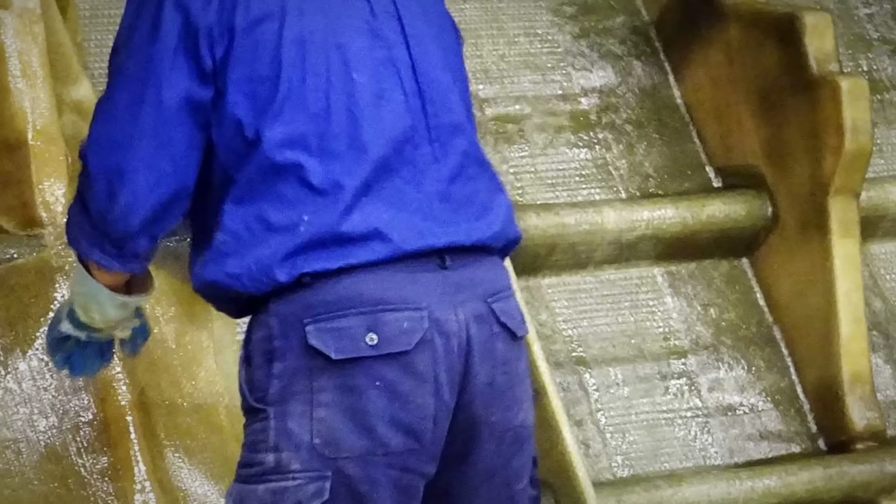Now, a 2016 production 34-foot boat. Spongy decks, delaminated stringer bonds, blistering below the waterline on a boat barely old enough to finance. Here is what does not add up. The stronger resin costs $3.91 per square foot. The weaker resin they actually use costs $7.50 per square foot. They are paying more to build a hull that fails.

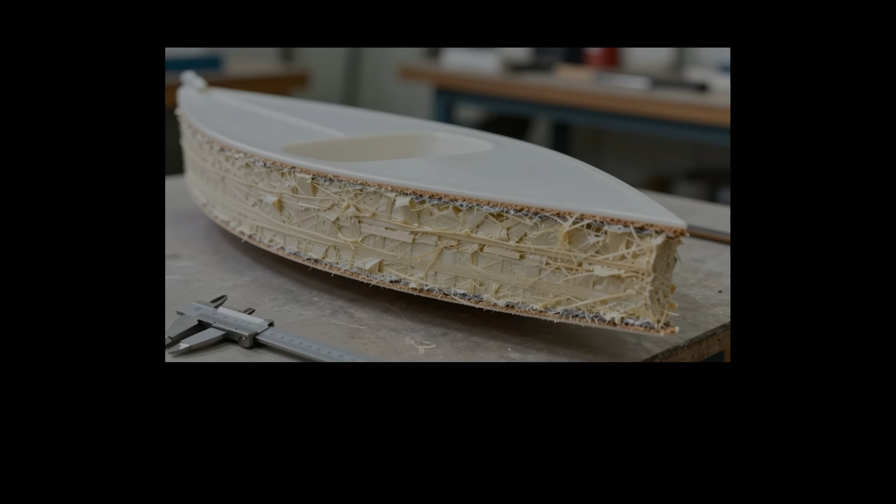Lay your palm flat against the hull of a Pearson from the 1970s and the surface feels cold, dense, almost indifferent to your touch. The gelcoat is just a thin shell over a wall of solid fiberglass. No give, no echo, just a muted resistance. Tap it with a knuckle, and the sound is unmistakable.

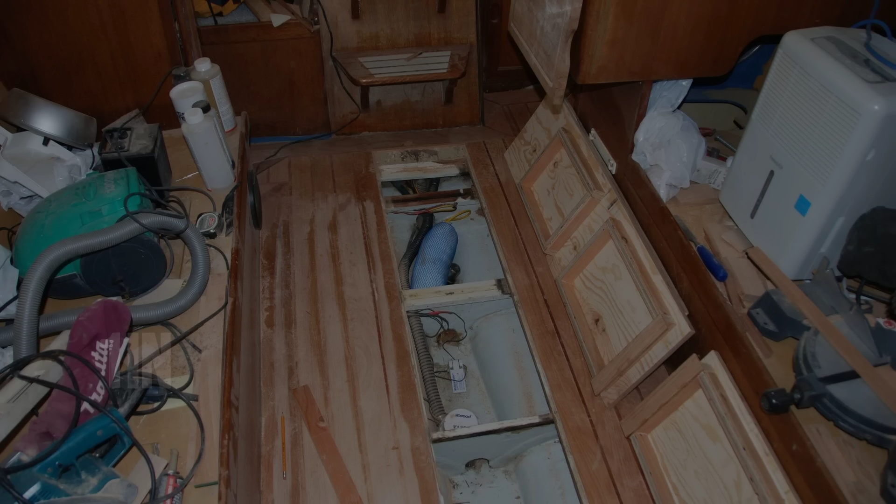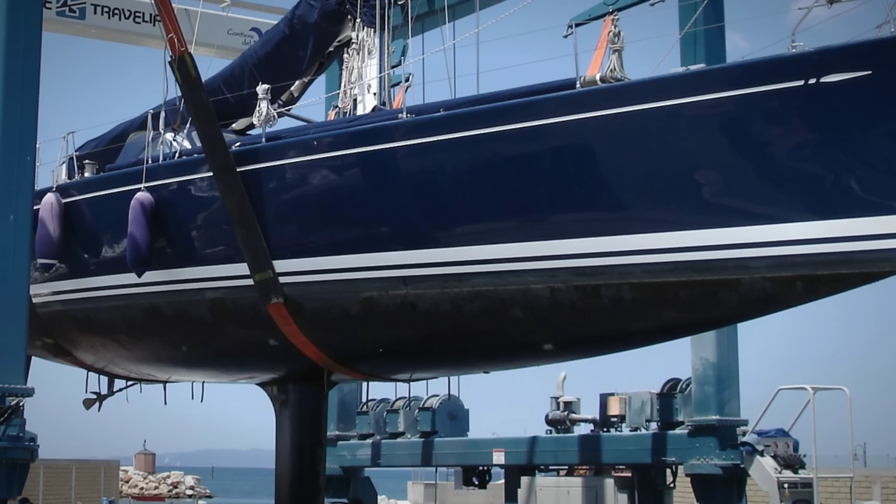A deep, ringing note that travels through an inch of hand-laid glass, woven roving stacked thick enough to dull any vibration. It is the sound of mass, of a hull built to shrug off decades of strain, water, and neglect. There is nothing accidental about that weight.

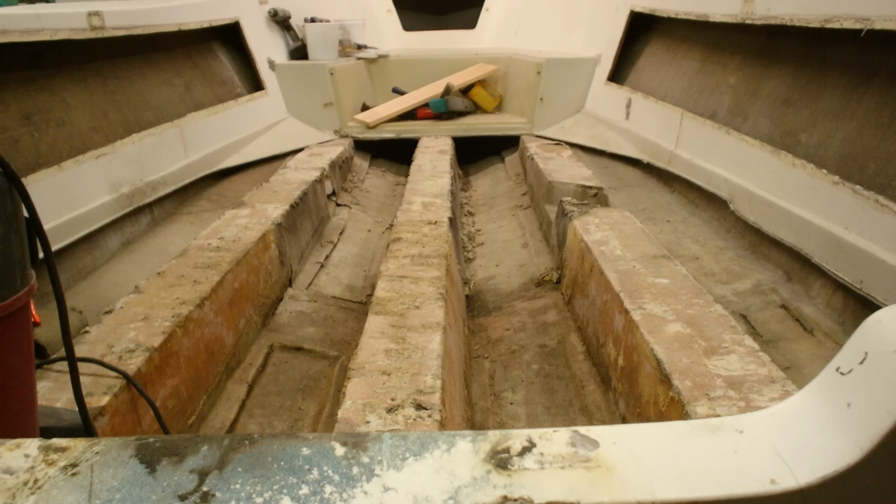Hull schedules from the era list layers of cloth and mat, each one hand-wet and rolled, building up a barrier nearly as thick as a butcher's block. No core, no sandwich, no shortcuts, just glass and resin, stacked until the hull could outlive its owner.

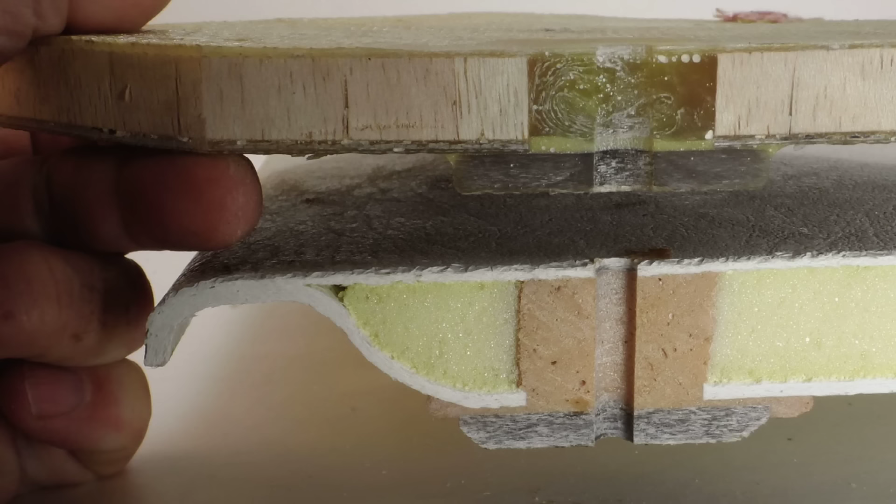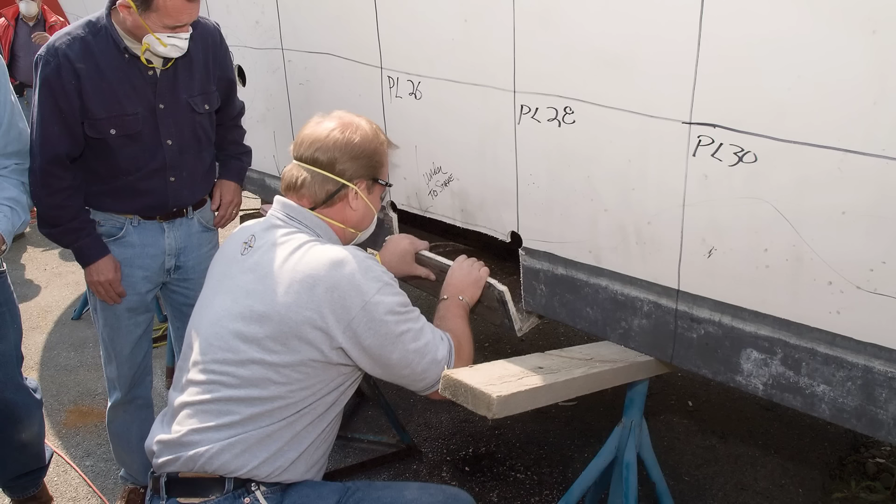Now, move to a modern production cruiser, built 40 years later. The first thing you notice is not a sound, but a feeling. The hull flexes under pressure from your thumb. The deck compresses ever so slightly beneath a heel. Tap the skin and the vibration is sharp, almost hollow, a quick plastic note that dies in the foam core.

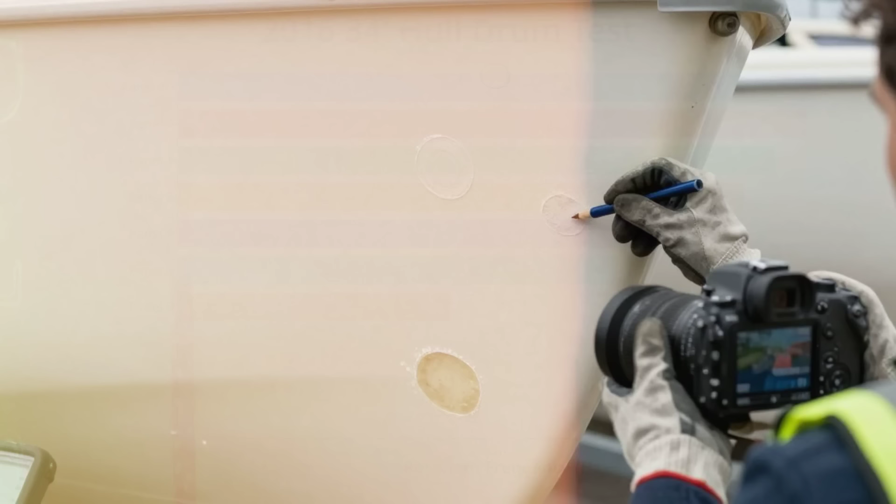The outer layer is thin, maybe 2 millimeters of glass, then a sandwich of lightweight foam, then another wafer of glass inside. What used to be a fortress is now a shell, engineered for weight savings and ease of assembly. The difference is not subtle. A drum test on a 2016 model yields scattered, uneven tones. Some panels ring, others thud, and a few simply buzz, betraying voids or bonds that never fully cured.

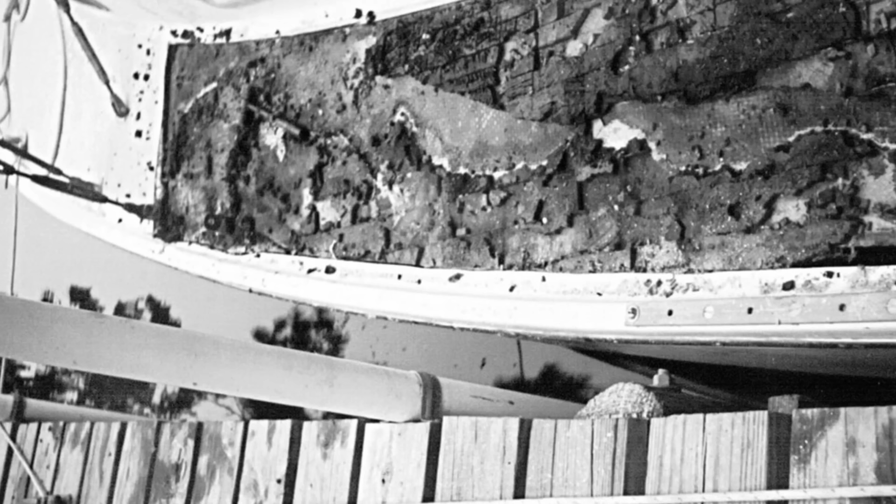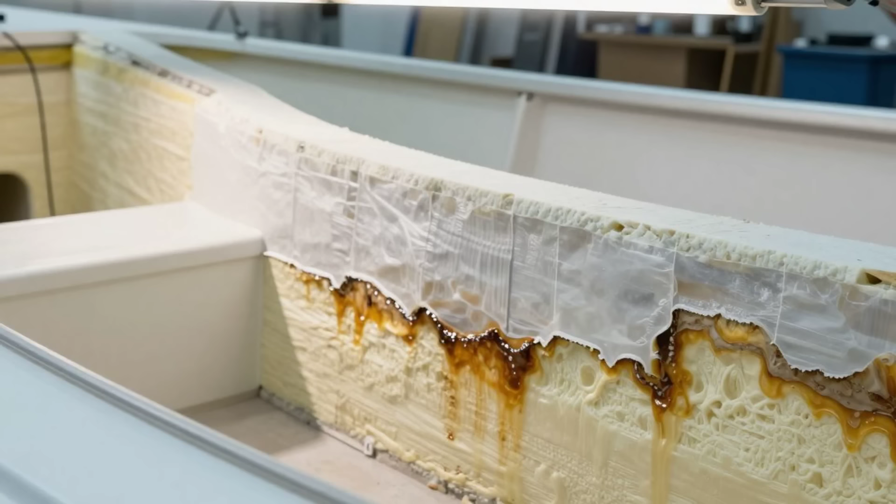People say the old hulls were overbuilt, as if that is a flaw. But there is a reason those boats still pass survey, still cross oceans, still sell for real money after 40 years. The new hulls, by contrast, can feel like they are holding together out of habit.

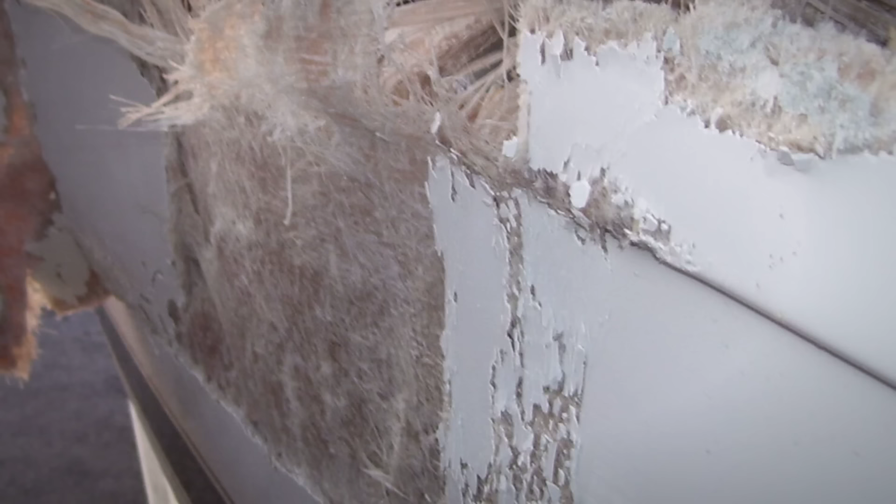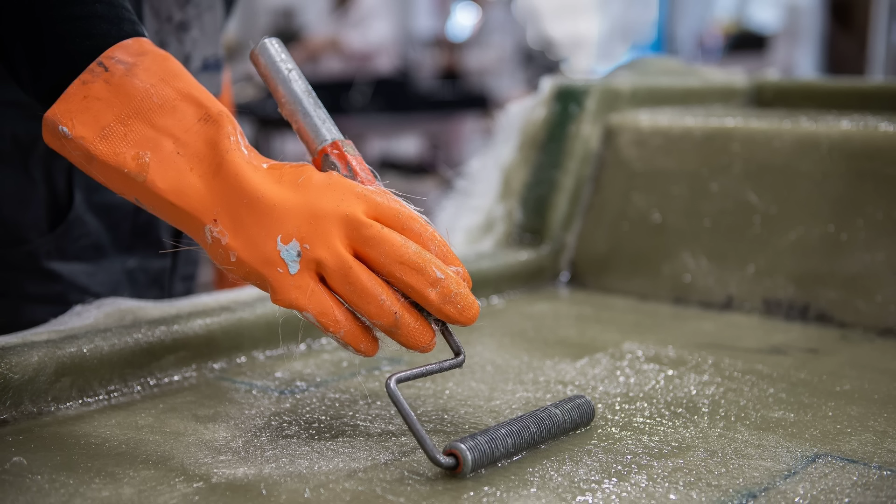The tactile difference is the first warning. The sound is the second. Something in the structure has changed, and you do not need a spreadsheet to sense it. The numbers are coming, and when you see them, the feeling in your hand will finally make sense. Here are the numbers they hoped you'd never see. Start with the resin math.

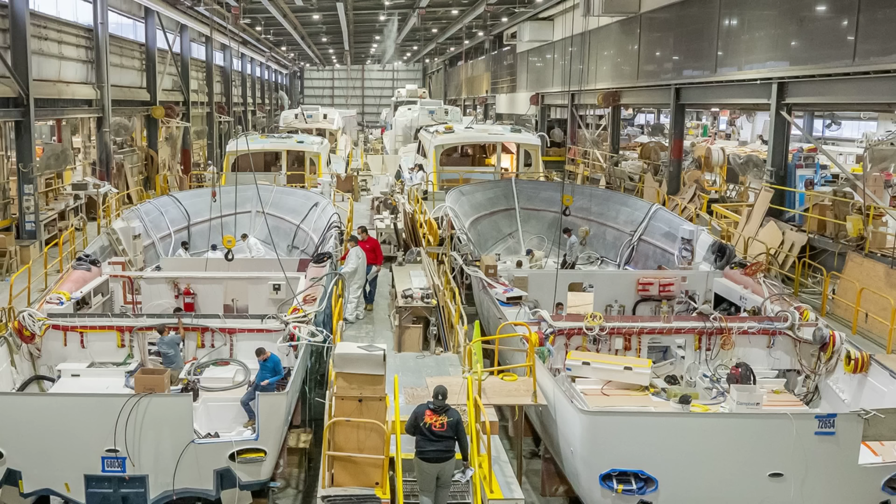The market is supposed to believe that polyester is the cheap way out, but the actual cost sheets tell a different story. For a square foot of hull, epoxy resin with woven glass clocks in at $3.91 per square foot. The so-called budget option, polyester with chopped strand mat, lands at $7.50 per square foot. That is not an outlier. It is a documented inversion, and it means builders are paying more to get less strength, less durability, and a shorter hull lifespan.

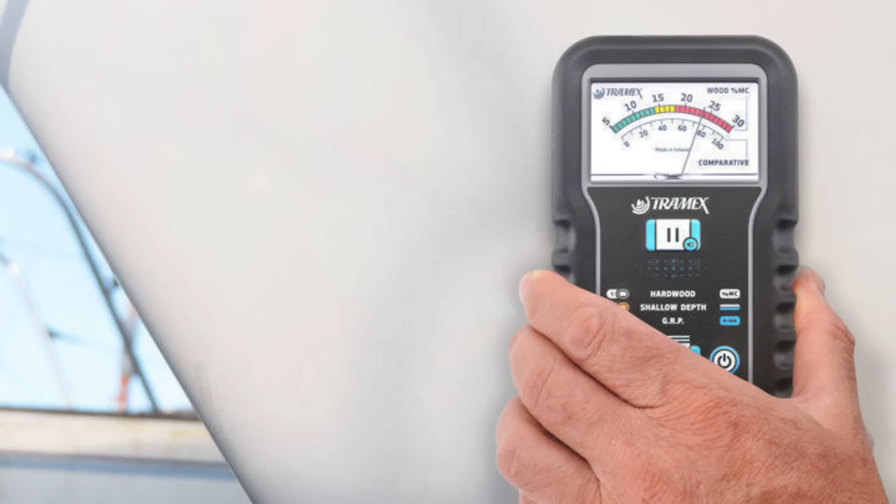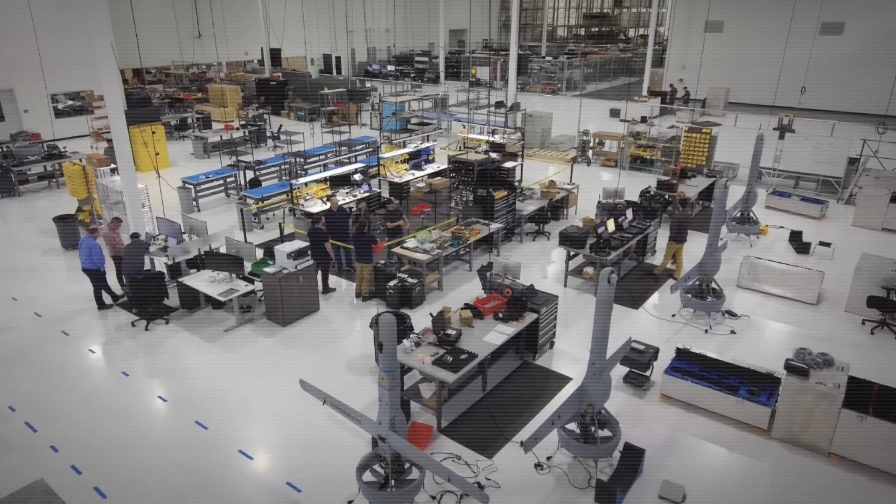Now take the labor that is supposed to keep these shortcuts in check. A dedicated quality control supervisor, someone who inspects every hull for voids, dry layup, and missed bonds, costs about $1,000 per boat. That is the gap. Skip that line item, and you pocket the difference. The result is a hull that leaves the factory with hidden defects baked in. Defects that will surface always, but never under warranty.

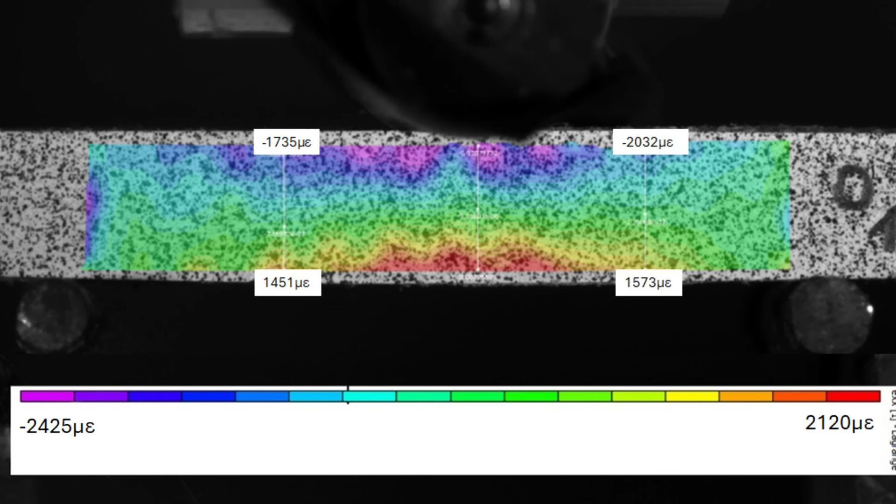Material science does not care about marketing. Polyester resin stretches to failure at about 1 to 2% elongation. Epoxy reaches 3.5 to 4.5% before it cracks. In practical terms, that is the difference between a hull that flexes and recovers, and a hull that micro-cracks under the stress of a single hard grounding. Every percentage point is a margin that has been erased by choice, not by accident.

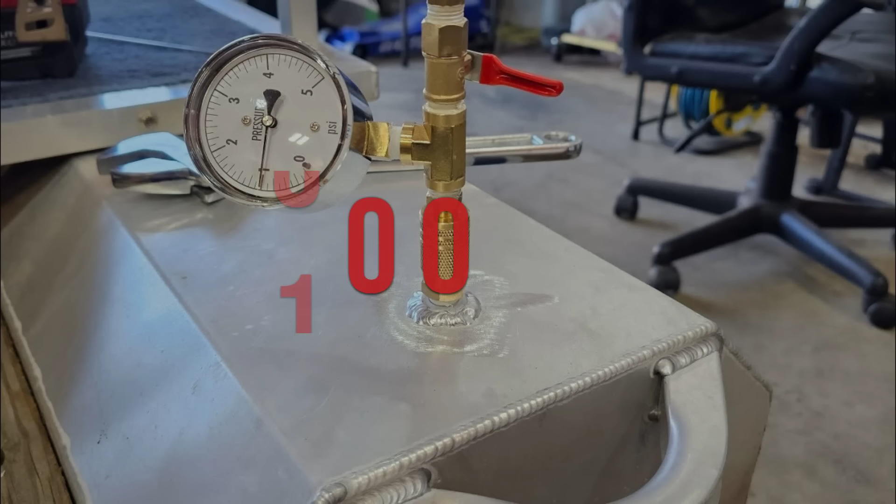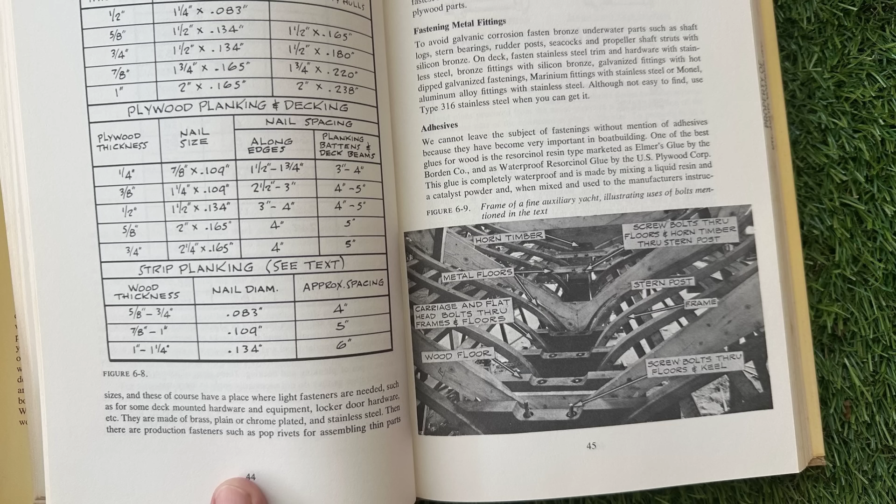Osmotic blistering is a numbers game too. When water gets past the gel coat, pressure inside a blister can reach 100 psi. That is enough to pry apart a thin laminate, especially when the skin is barely 2 millimeters thick. The industry's own manuals confirm these thresholds. The risk is not theoretical. It is measurable, repeatable, and ignored by design.

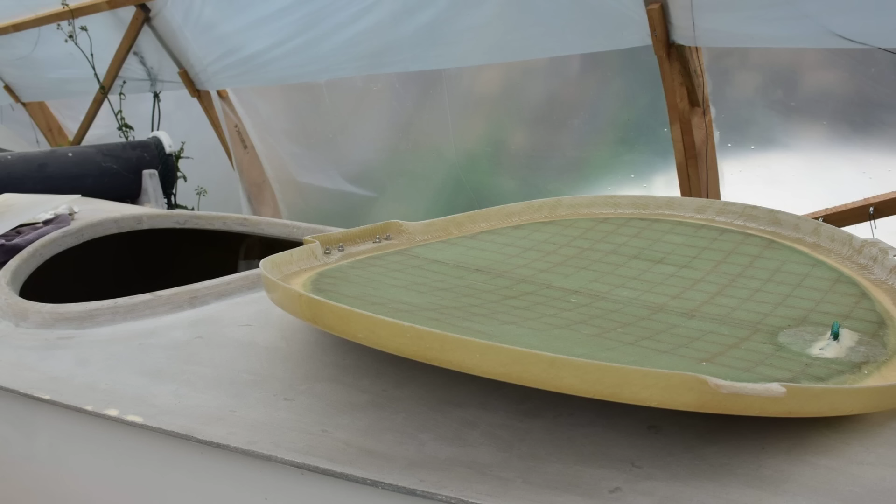Then there is the timeline. Lenders and insurers quietly cap their risk at 15 to 20 years for most modern production hulls. That is not a coincidence. It is an actuarial echo of the engineered failure window, the moment when the cost savings come due and the next owner inherits the bill.

These numbers are not opinions. They are the ledger entries of a business model that trades structural integrity for short-term margin. The math is right there, and it is not on your side.

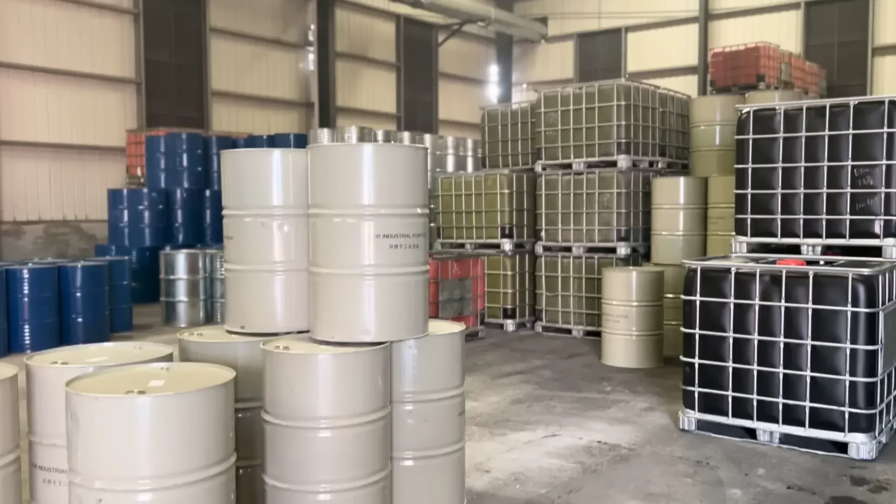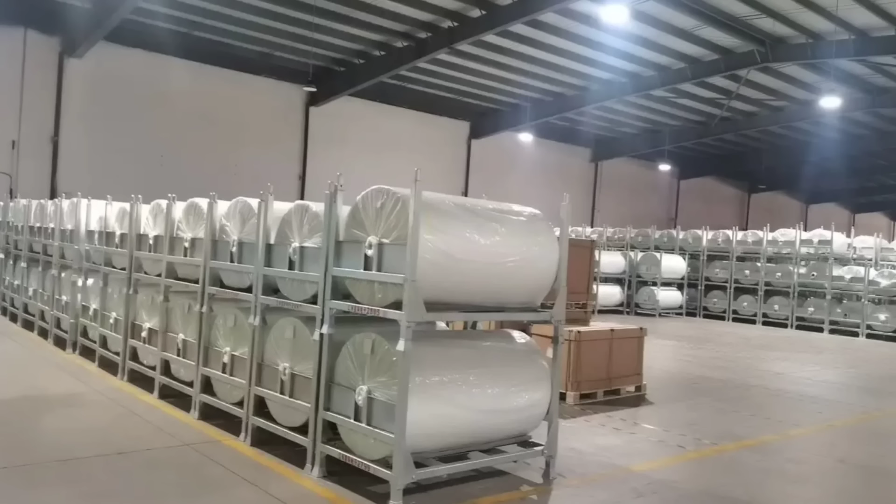The numbers first shift in the resin. Polyester, long favored for its speed and low upfront cost, now costs more per square foot than a thinner, stronger epoxy layup. Builders pay $7.50 per square foot for polyester and chopped strand mat, compared to $3.91 for epoxy and woven glass.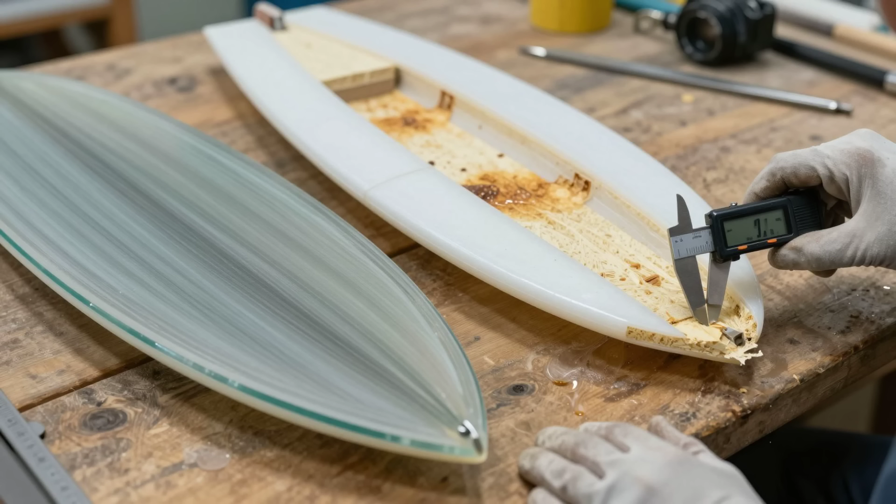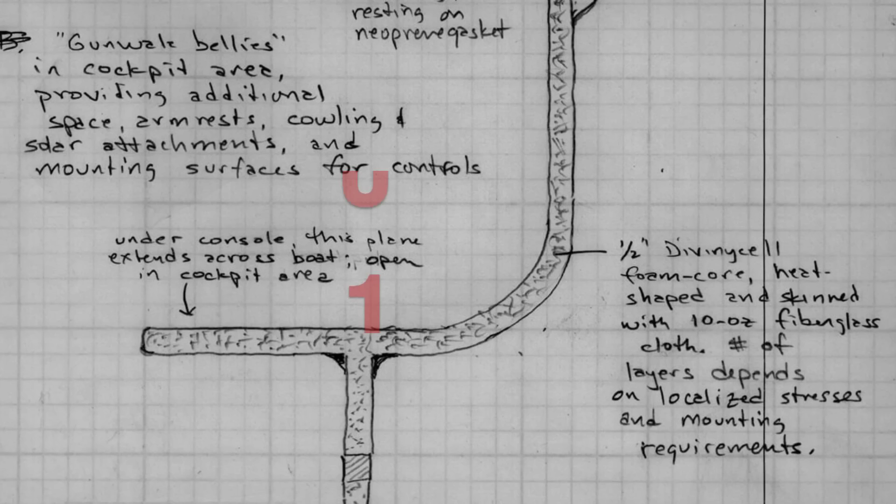The difference is stark. Polyester glass coupons fail at 1 to 2% elongation, while epoxy stretches to 4%. That margin is the line between a hull that cracks in a storm and one that survives. Layup thickness tells the next part of the story. Older hulls stacked up to an inch of glass, 6 or more layers of woven roving and mat. Modern hulls often have just 2 millimeters of glass on the outer skin before the core. That is thinner than a credit card.

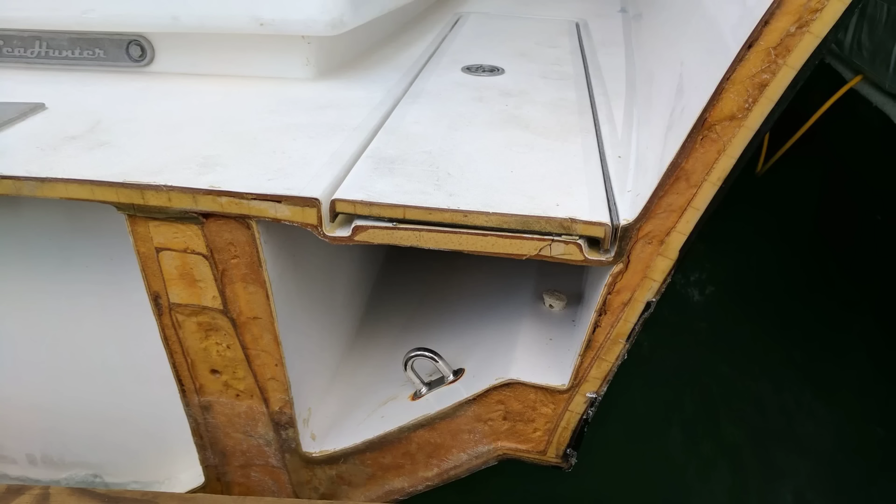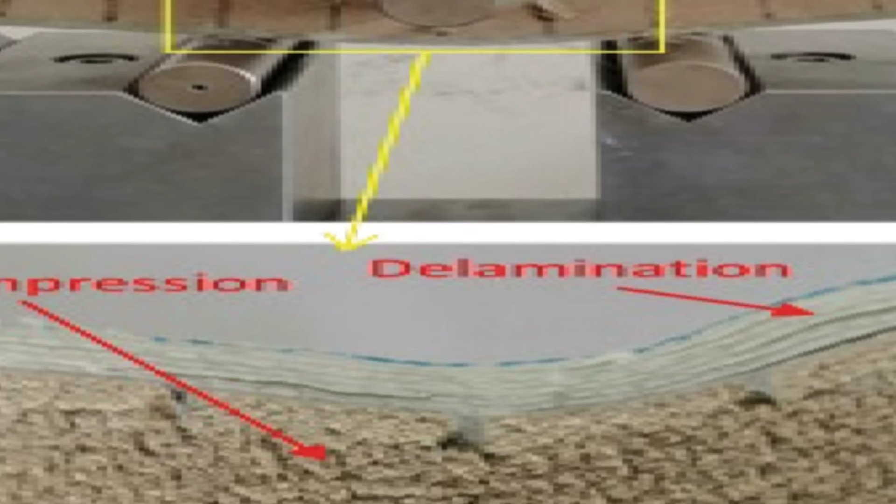The core, foam or balsa, adds stiffness but brings new risks. Closed cell foam absorbs less than 2% water by volume, but a single breach or missed bond can turn it into a sponge. Water migrates along the bond line, delaminating the skin from the core with every freeze-thaw or pressure cycle. Balsa fares worse. Once wet, it never truly dries, and rot spreads unseen, often escaping notice until the hull is compromised. Each decision, resin, layup, core, trades durability for convenience.

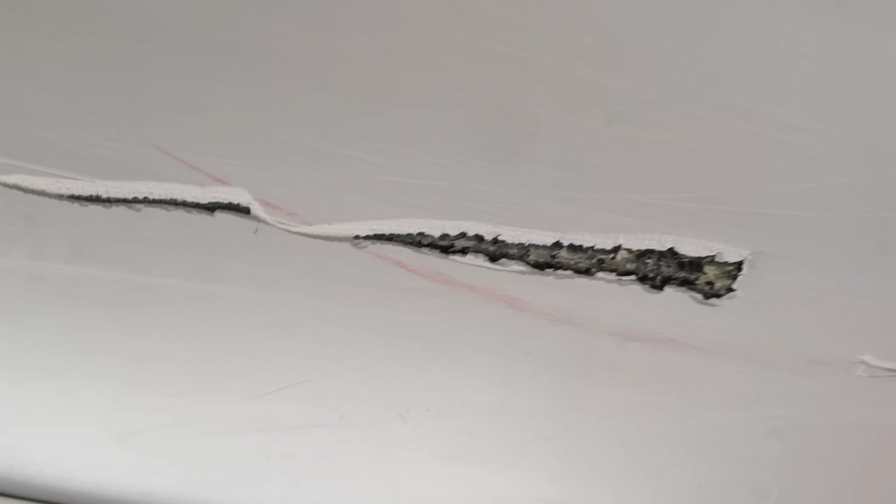The numbers are clear. Every shortcut compounds the next vulnerability, and the owner inherits the consequences: rising repair bills, lost value, and sometimes the slow decline of a boat built to last but engineered to fail. Barrier coat disappears from the build list with a single line that says omit epoxy barrier except at structural joints. On paper, it is a minor omission. In practice, it leaves the hull exposed, just gel coat and hope between the ocean and the core.

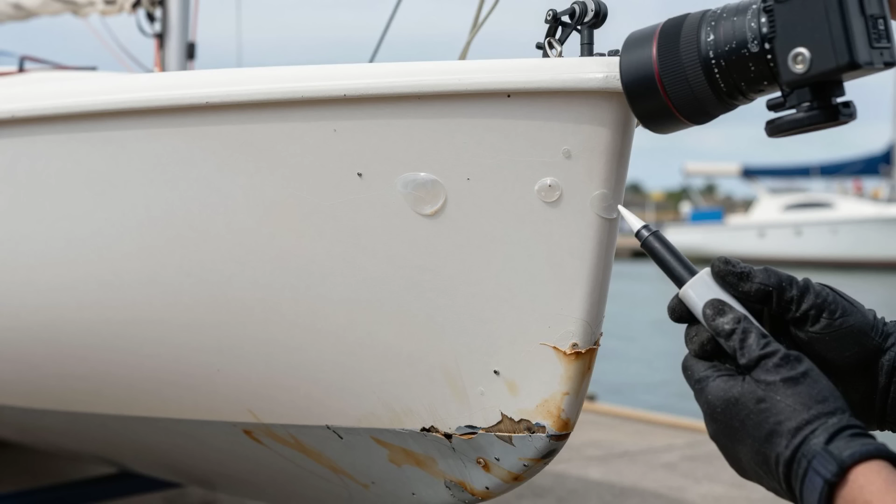Polyester resin breathes water vapor. Epoxy blocks it. Skip the barrier, and every scratch or pinhole becomes an entry point. The savings are immediate, a few hours and a few $100s per hull. The damage arrives years later in blisters and swelling that no warranty will touch.

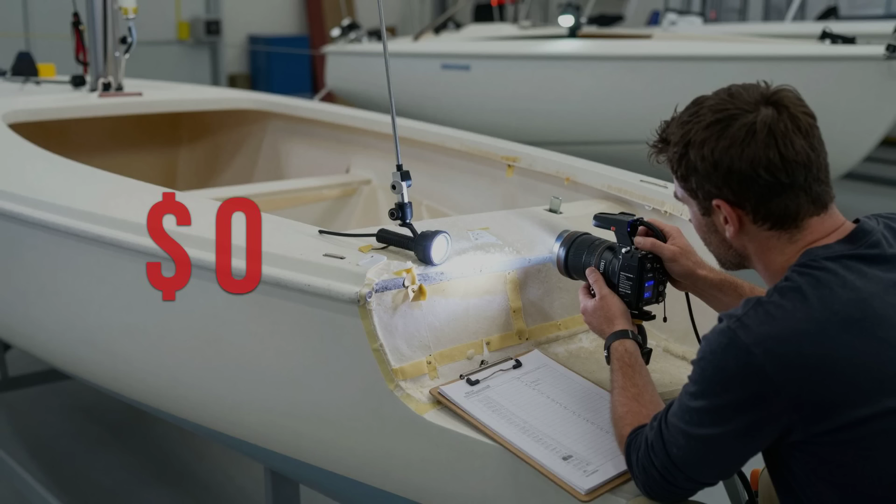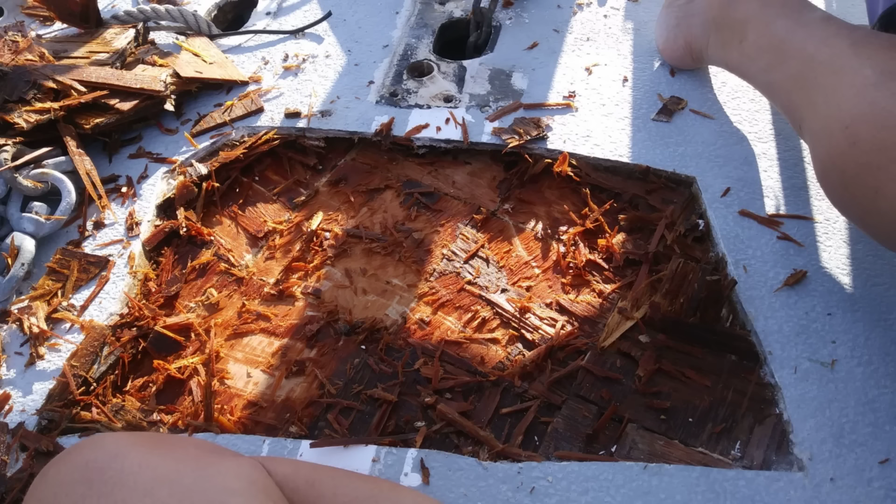Quality control is the next shortcut, buried in the numbers. A factory can hire a dedicated inspector for about $1,000 per boat, one person to check every bond, every tab, every core for dry spots and voids. The math is simple. Most hidden defects could be caught, but that line is easy to cut. The savings show up on the balance sheet. The failures show up in the field: dry layups, missed bonds, cores that never fully adhere. These are not rare mistakes. They are the predictable result of skipping the only step that could have stopped them.

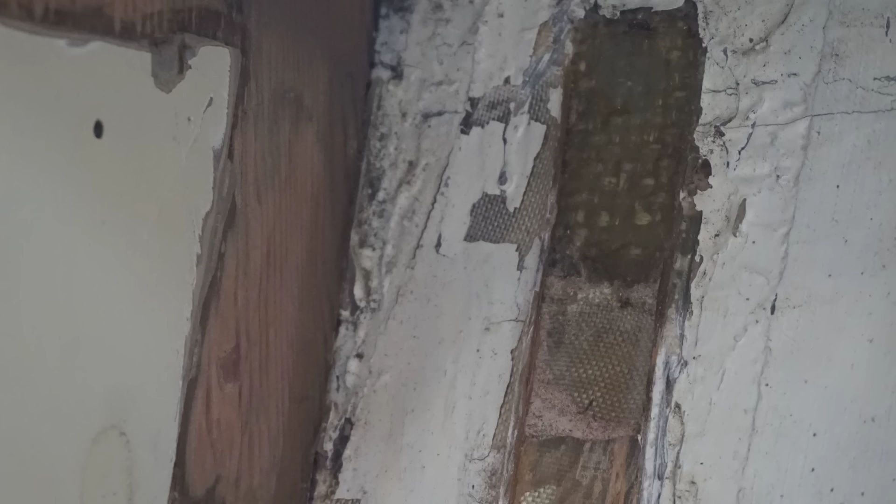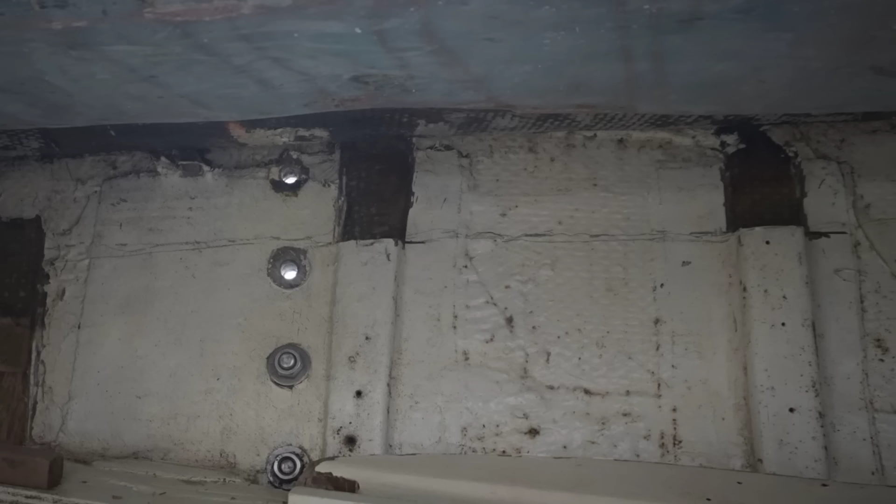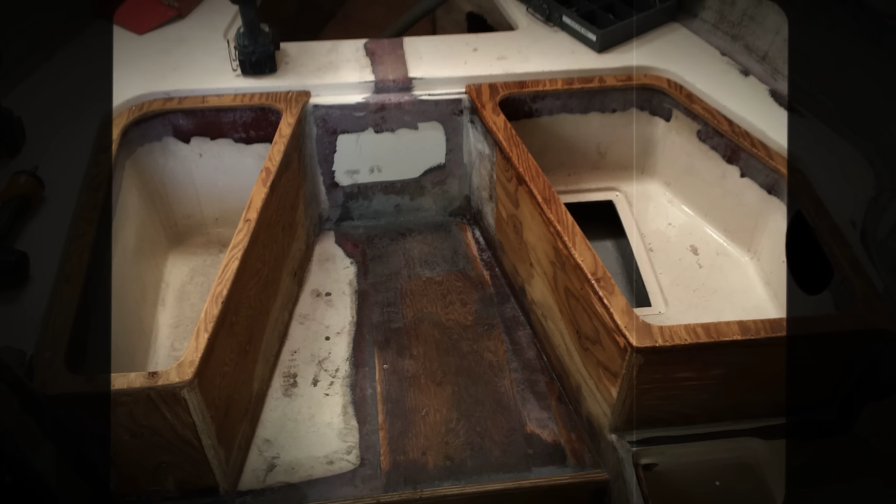Grid bonding reveals the logic. Builders save the epoxy for one place, the bulkhead tabs. Everywhere else, polyester resin holds the structure together. The proof is physical. Cut open a hull and the bulkhead tabs stand out. Different color, different sheen. Epoxy, labeled and logged, bonds the visible joint. The rest relies on the cheaper resin, out of sight.

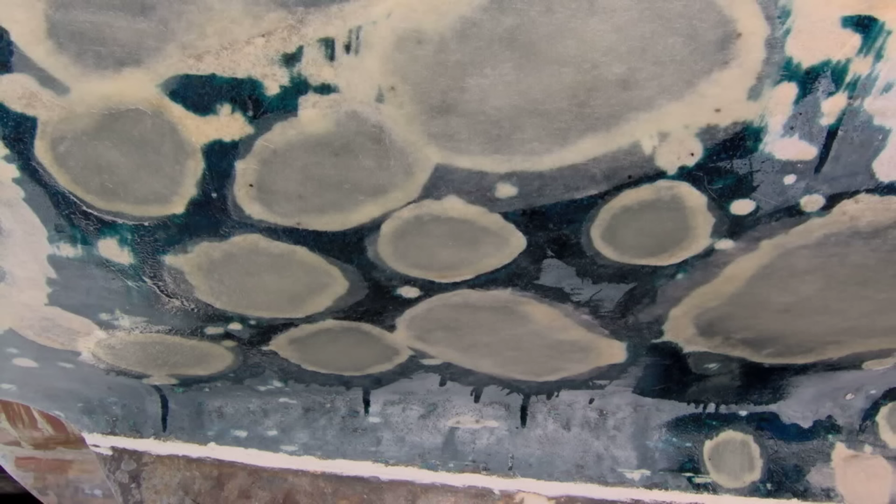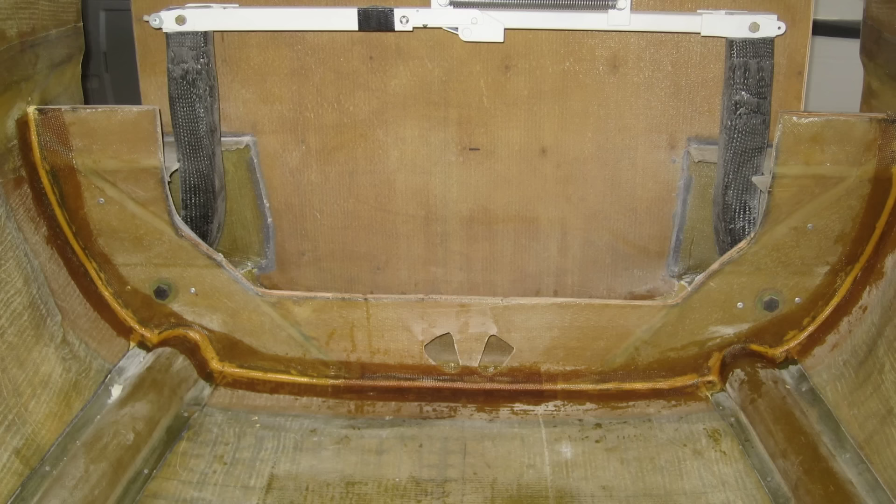One retired owner learned the cost. He paid extra for a blue water package, trusting the promise of offshore strength. 5 years later, blisters spread across the hull. The surveyor's hammer mapped delamination along the grid lines where the barrier coat was omitted. Insurance refused the claim. The builder pointed to the fine print. His retirement plan dissolved in the cost of repairs. These are not isolated errors. They are choices made by people who know exactly what they are doing. The evidence is in the resin, in the skipped steps, in the places where the right material appears only where it is visible.

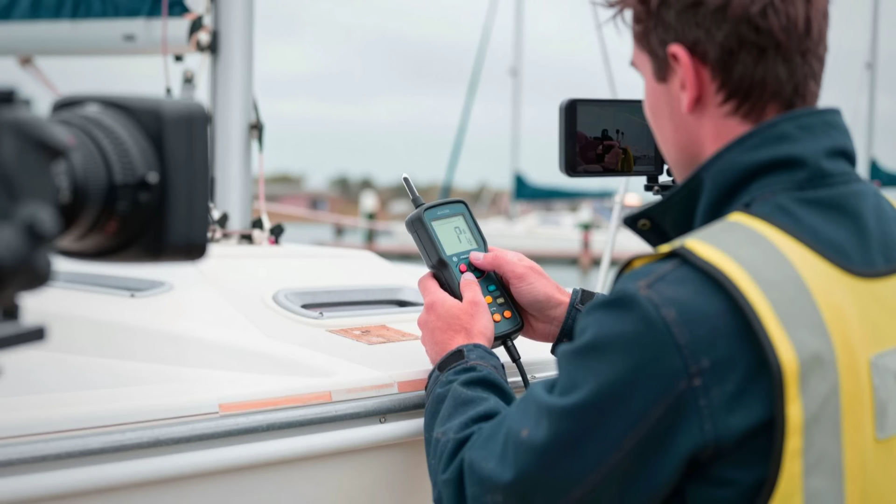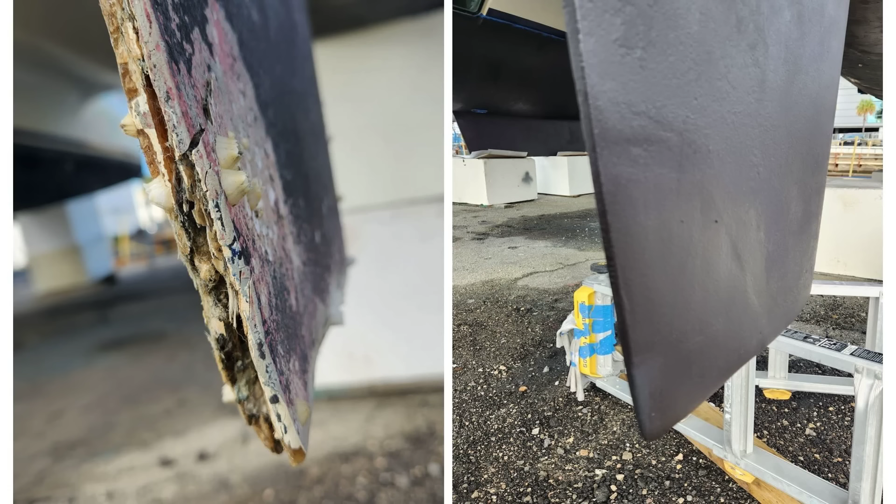Moisture meters and survey hammers promise peace of mind, but the reality beneath a modern hull is far less reassuring. The tools most buyers rely on are blind to the failures that matter. A moisture meter reads surface conductivity, a few millimeters deep at best, while waterlogged balsa or foam can hide inches below, sealed off by a thin skin that reads dry. Surveyors know the limits. A deck or hull can pass inspection with a perfect meter reading, even as water migrates along a failed bond line and delaminates the skin from the core out of sight.

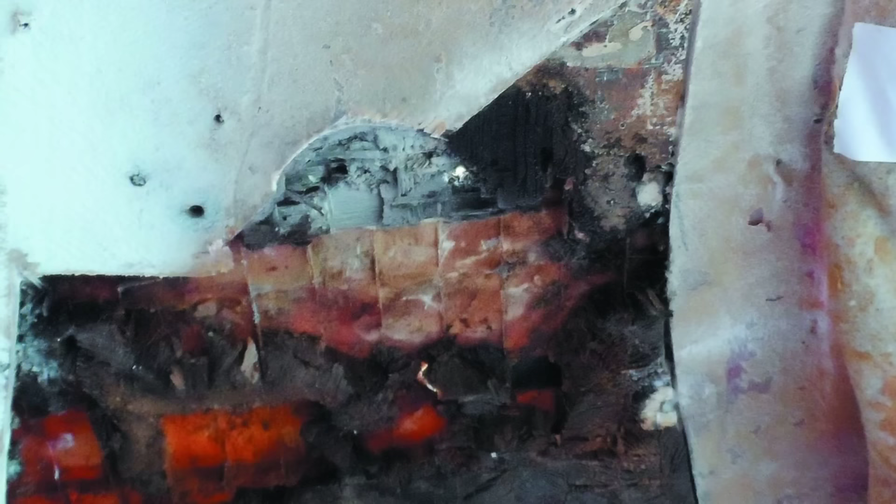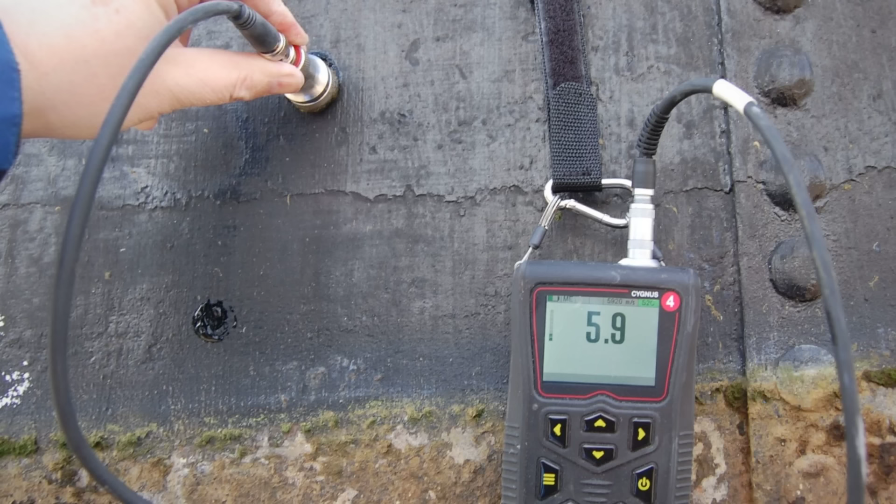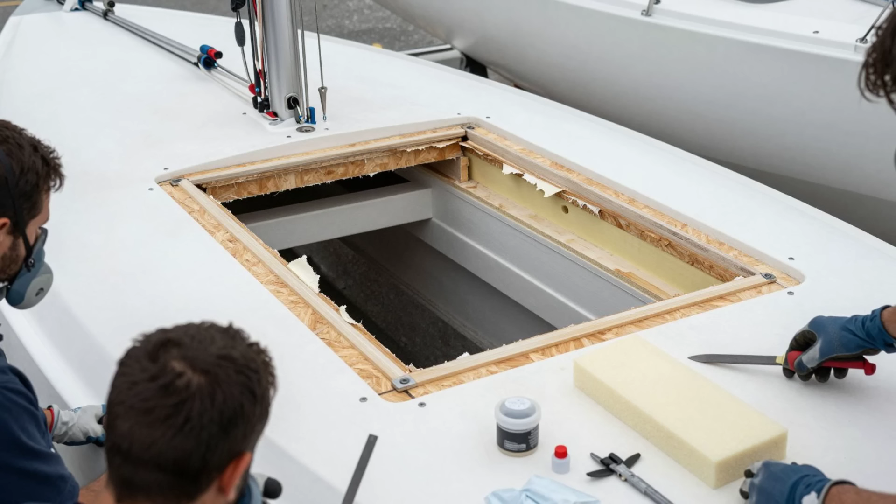False negatives aren't rare. Field reports and technical bulletins document cases where moisture meters gave the all clear, only for a core sample to reveal rot or a void spreading like a bruise beneath the laminate. The underlying physics is simple. Water travels along the weakest plane, often the glue line between core and skin, and unless the skin is breached or the core is exposed, the meter sees nothing. Even advanced ultrasonic gauges can struggle to resolve a delamination, unless the void is large and continuous. Small, isolated failures, the kind that start the chain reaction, go undetected until the damage is irreversible.

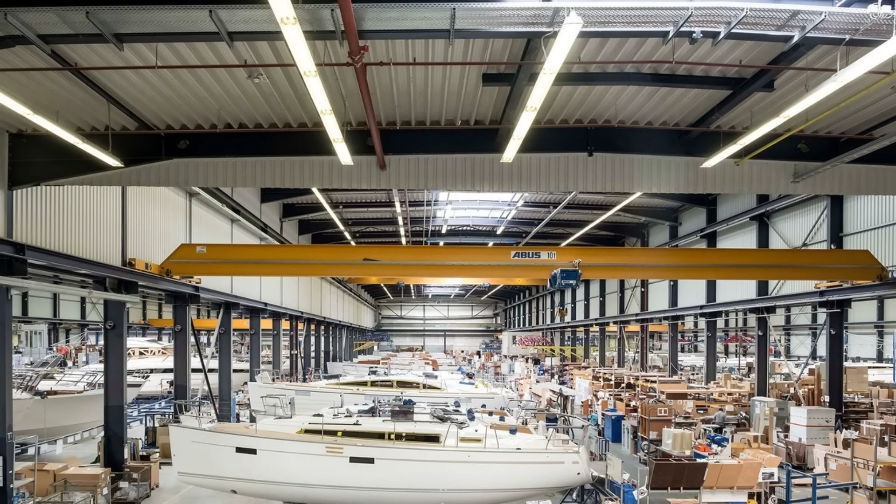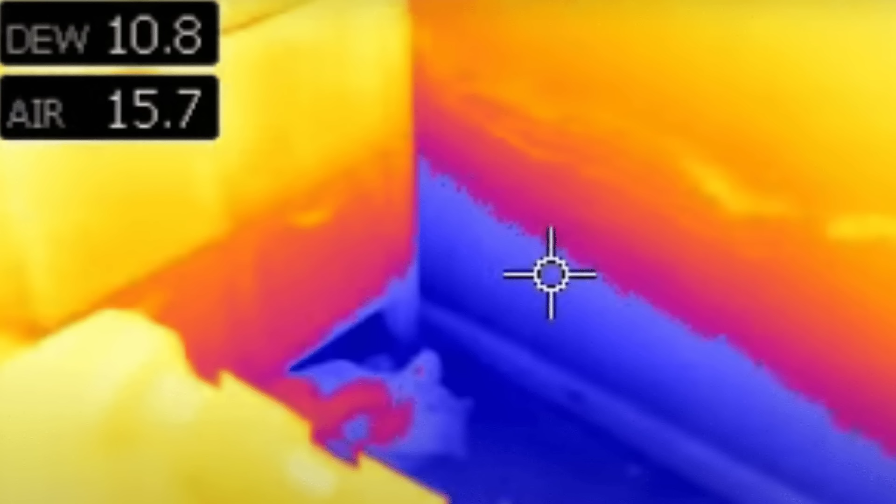David Pascoe's critique of moisture meters is blunt. They offer a false sense of security, especially on cored hulls built to a price. The high rate of missed failures is not a quirk. It is a technical limitation. Owners who trust the survey alone are gambling with thousands of dollars. The real risk is invisible, and by the time the symptoms appear, soft spots, blisters, or a hollow thud, the financial fallout is already set in motion. A hull's journey does not end at launch.

Ownership shifts from the first buyer, often a young family eager for adventure, to a second buyer who might stretch finances for a loan or new insurance. By the time a third owner steps aboard, usually someone nearing retirement, the rules have already changed. Lenders and insurers track hull age with precision. Most production boats built after 2000 hit a wall at 15 to 20 years.

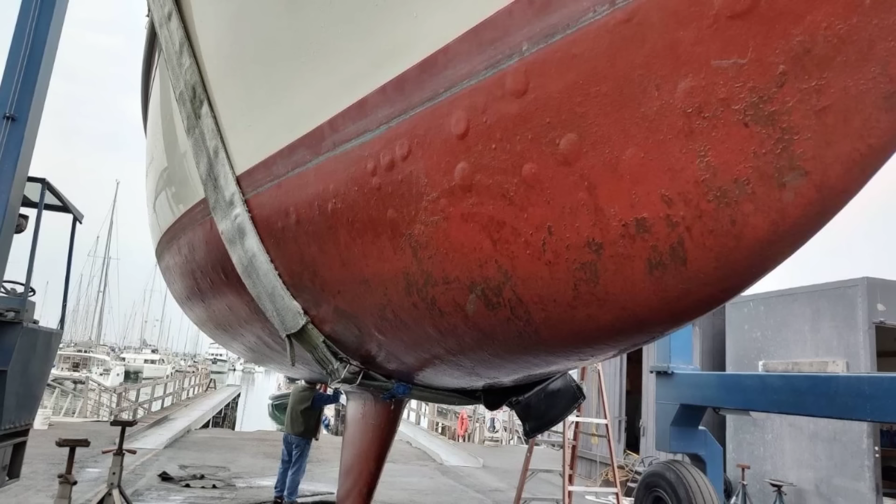Loans become harder to secure. Insurance terms shrink and premiums jump. Some carriers will not even quote. These are not arbitrary decisions. Actuarial data shows risk climbing steeply as hidden flaws, blistering, core rot, and delamination emerge just as warranties expire.

In the used market, the pattern is clear. Over 3,400 production sailboats, most between 9 and 15 years old, fill the listings. This is not just turnover, it is owners racing to sell before the next survey or renewal. In Florida, Texas, and Louisiana, insurers have quietly raised premiums by up to 28% for boats in this age band, citing a rise in claims. Lenders now cap loans at 15 years, survey results be damned.

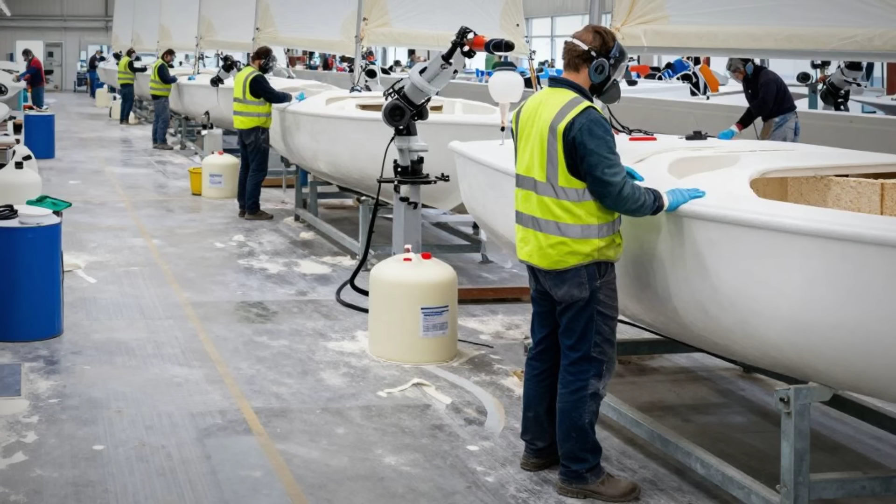The result is a steady transfer of risk, from builder to first owner, then to the next, and finally to the retiree, hoping for one last voyage. By then, repair bills are uninsurable, resale value collapses, and the financial hit lands on those least able to absorb it. This is not about neglect. It is a system built to shift costs downstream, where the illusion of a bargain vanishes and the last owner shoulders the real price.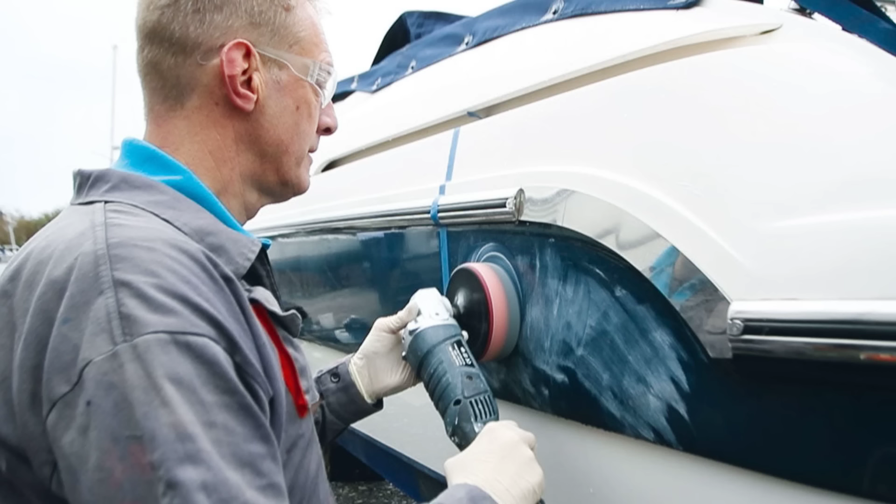Accountants don't use hammers or meters. They use spreadsheets. The real decisions get made in quiet offices, not on the shop floor. Every shortcut in a production hull starts as a row in a ledger, weighed against the cost of warranty claims in the window when liability disappears. The numbers are blunt. A dedicated quality control supervisor, someone who could catch dry layups and voids before the hull leaves the mold, costs $1,000 per boat. That line is easy to strike.

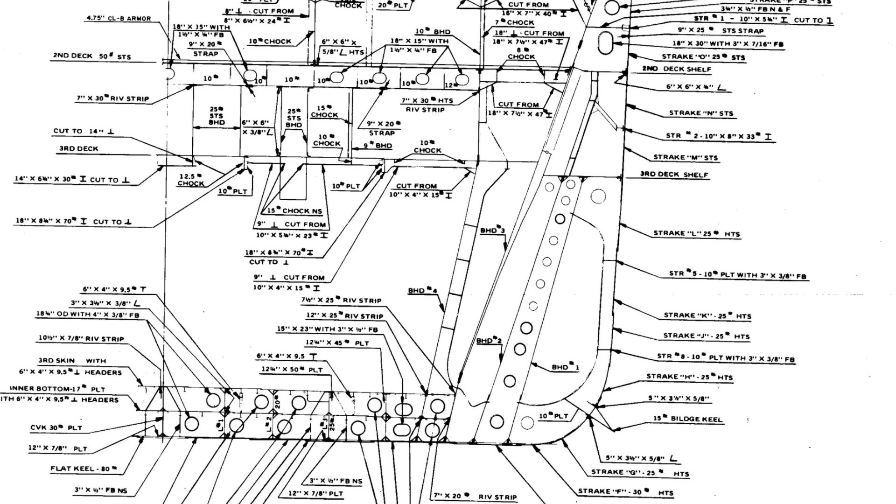Multiply it by a production run of 200 hulls, and the savings hit six figures, all booked before the first owner ever steps aboard. The logic runs deeper. Builders know the probability curve. Most serious delamination and core failures don't appear until year 7, year 10, or year 12, just after the warranty expires, and just before lenders and insurers start tightening their terms. Failures that show up in year 15 are someone else's problem.

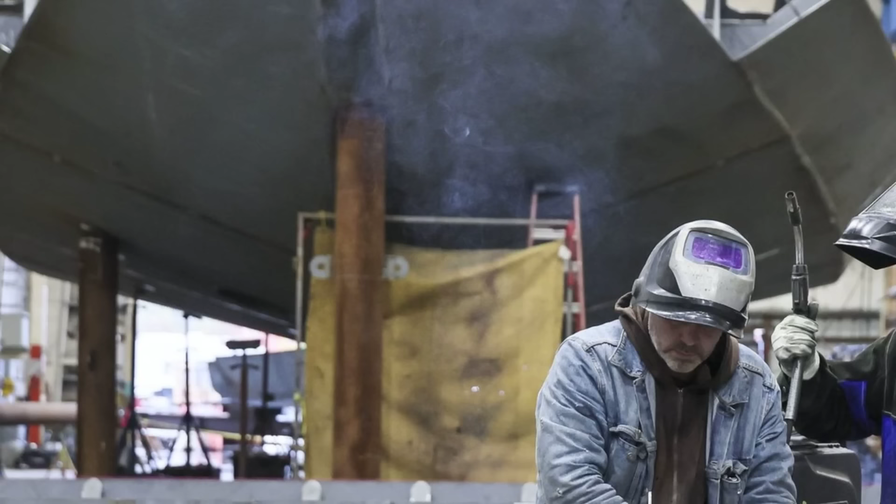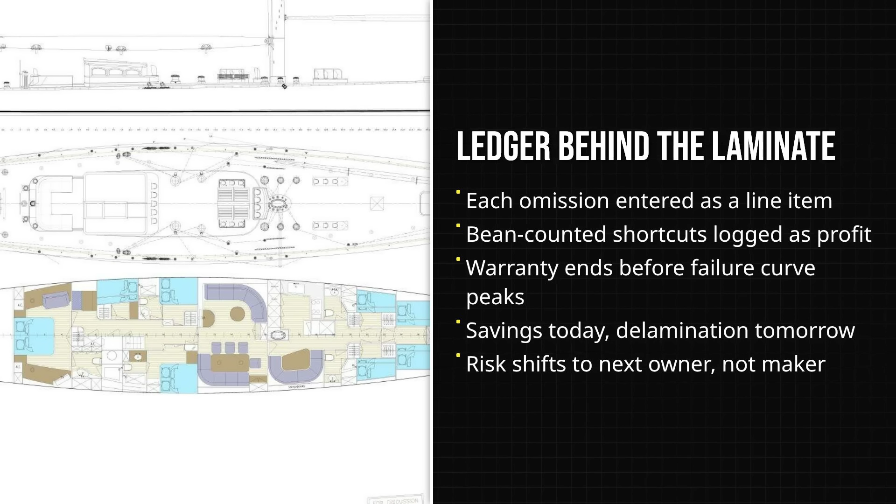The cost of catching those defects before launch is real, but the cost of letting them pass is deferred, often for a decade or more. That's how the business stays solvent. The ledger tracks every omitted barrier coat, every skipped inspection, every resin downgrade. The savings are immediate, predictable, and scalable. The risk is distributed, first to the buyer, then to the next owner, and finally to the retiree, with a survey in hand and no recourse.

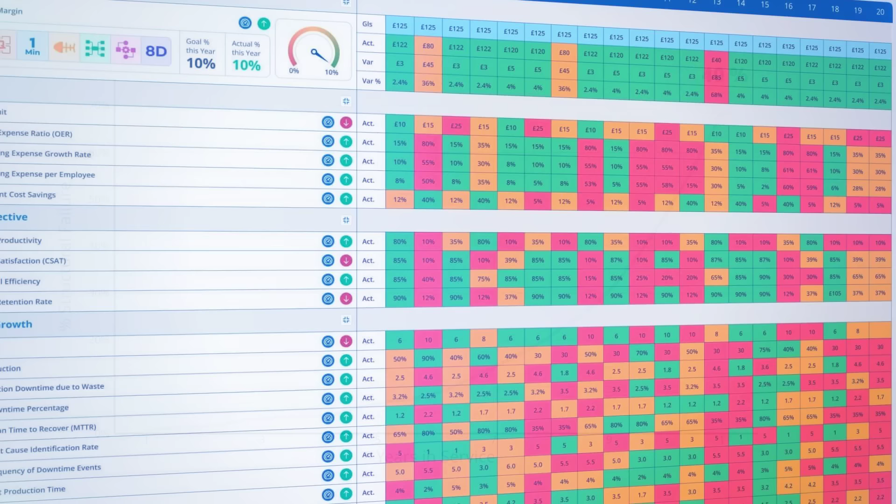This is not accidental. It's a decay curve plotted to fall just outside the warranty window, engineered by people who know exactly how long their product needs to hold together. The numbers don't lie. They just wait.

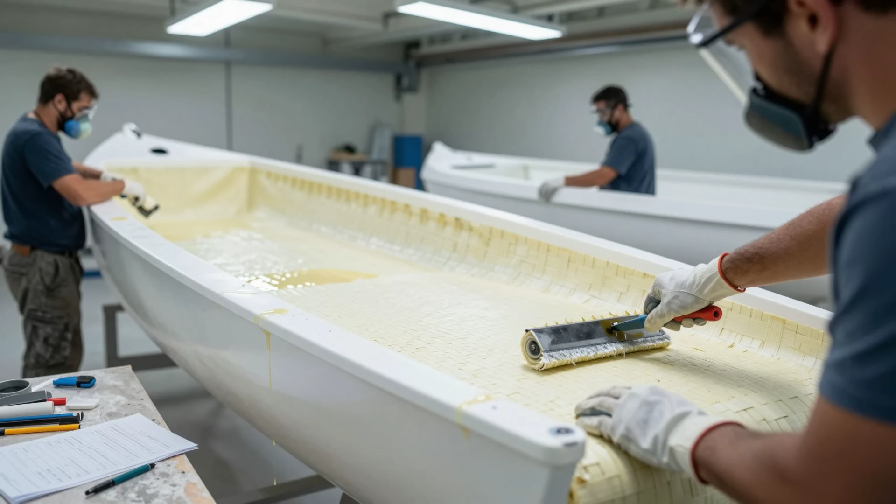They called it a flaw, overbuilt and overweight, too much glass for the job. The term became a punchline, shorthand for boats that were supposedly stuck in the past. But after 4 decades, those same hulls refused to die. The thickness that once drew ridicule is the only reason these boats still float, still pass survey, still command a premium from buyers who know what they are looking at. Every extra layer, every ounce of glass was a margin of safety, put there by builders who understood that the ocean does not care about marketing or quarterly earnings.

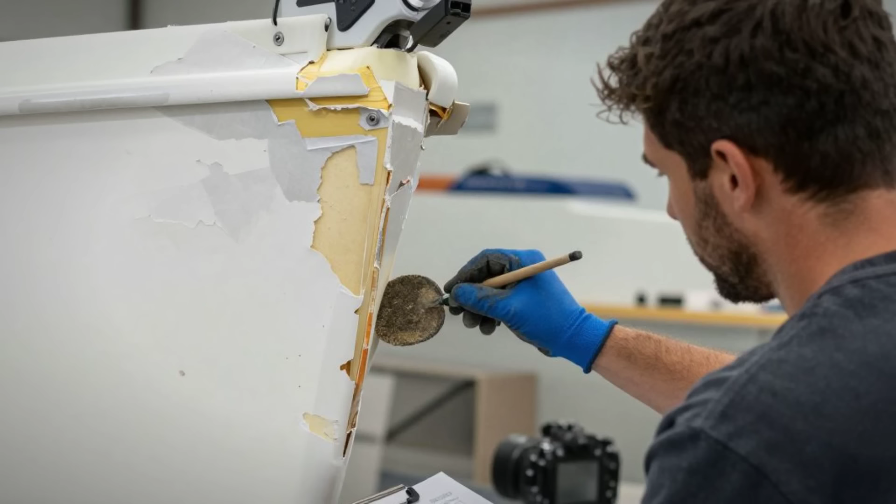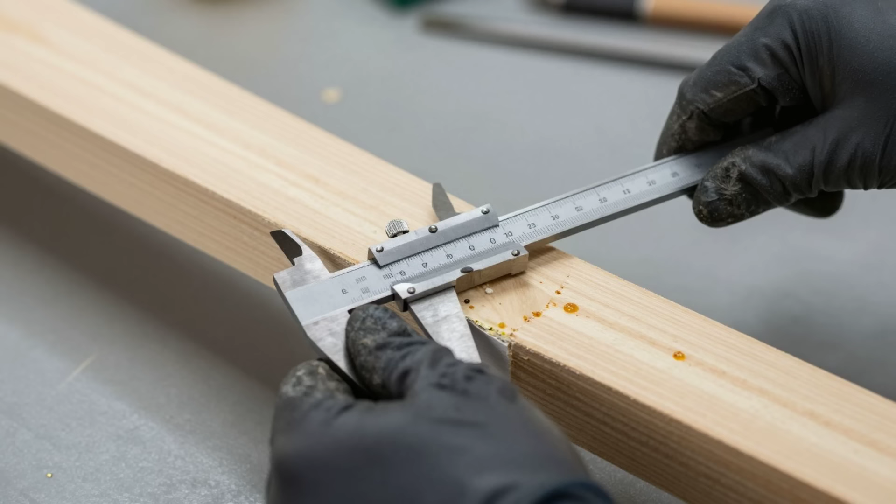The so-called excess was not waste, it was insurance, paid up front, in glass and resin, instead of in survey bills and failed insurance claims years down the line. The hulls that survived from the 1970s and the 1980s were built with a margin that has vanished from modern production. That margin is not theoretical. It is measured in millimeters of laminate, in pounds per square foot, in the deep, solid ring you feel under your hand. It is the only reason a 40-year-old Pearson or Cape Dory can shrug off a grounding, dry out after a leak, or take a second owner across blue water without flinching.

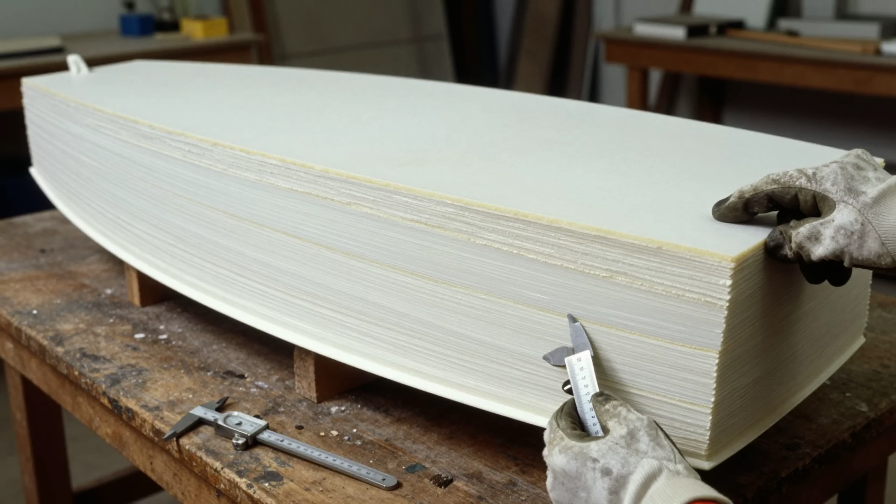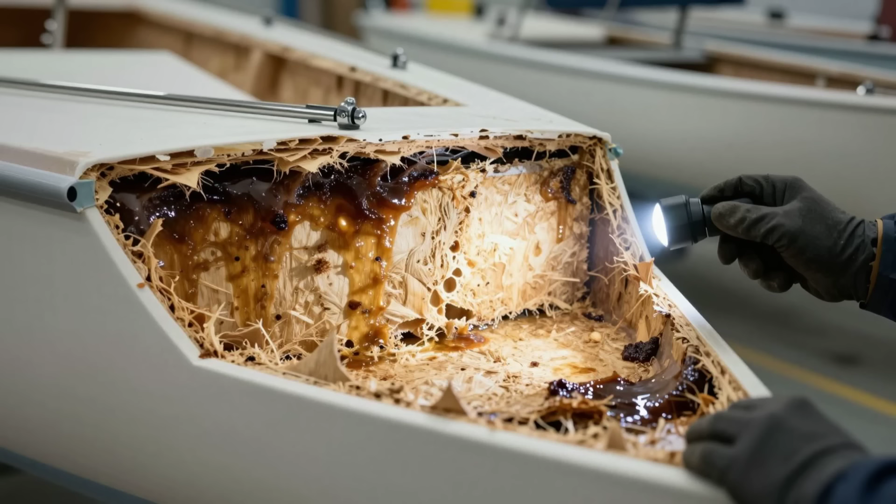The industry spent years convincing buyers that overbuilt boats were relics, heavy, inefficient, unsophisticated, but the evidence is in the water. The last honest fiberglass hulls are the ones that refused to cut corners, that carried an extra 1/8 of an inch just in case. The difference between a boat that is still alive at 40 and one that fails at 15 is measured in those lost margins. Overbuilt was never a flaw. It was the last act of honesty in a business that has since learned how to hide the cost of failure where no one can see it.